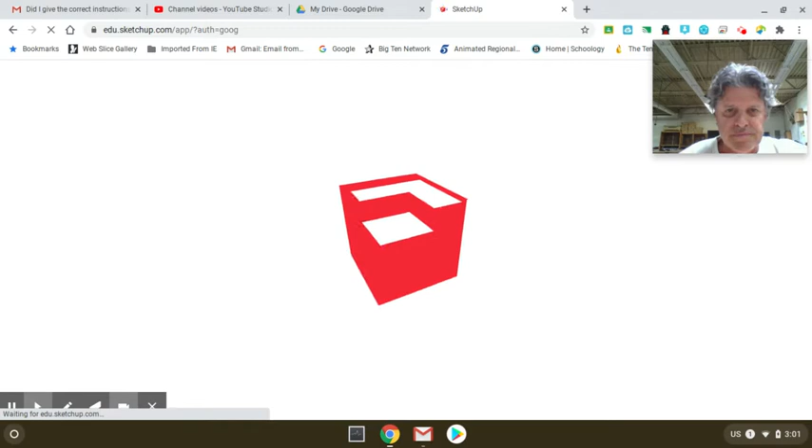We're going to go to the Waffle, and once you're in the Waffle, you can scroll down until you find SketchUp for Schools, and go ahead and click on that. You'll see that we get this throbbing or growing and collapsing building. I'm just going to wait till that gets done. Yours may take a while also, but once it finally opens up, we'll be ready to go.

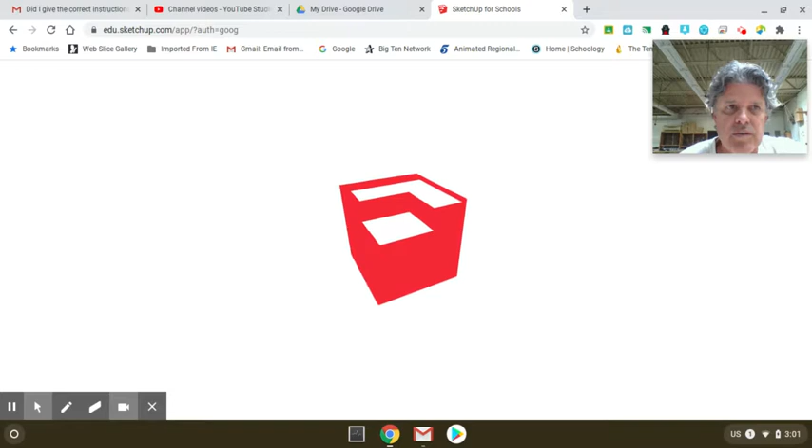Okay, so here we go. I'm back. And you can see once it opens up, it'll look like this. And what I'm going to have us do is go ahead and go here to where it says Create New.

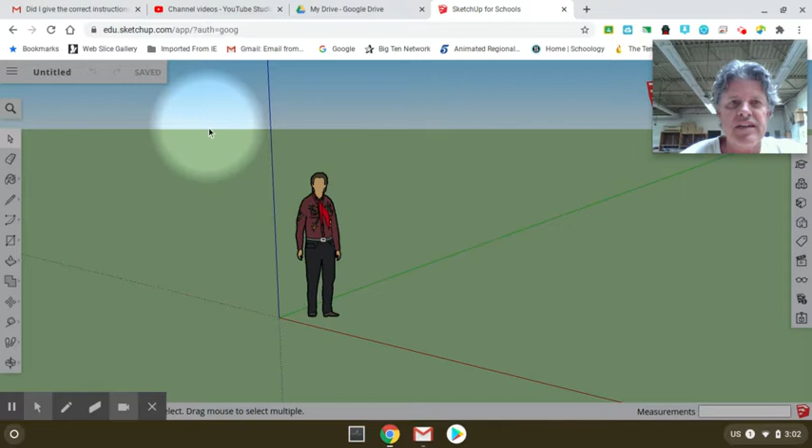Whenever we go Create New, we are going to go feet and inches, so I'm going to go ahead and click on that. And that brings us to this screen here. This is our tool palette of the different things we can do. Hopefully we'll learn a little bit about that as we do this first thing.

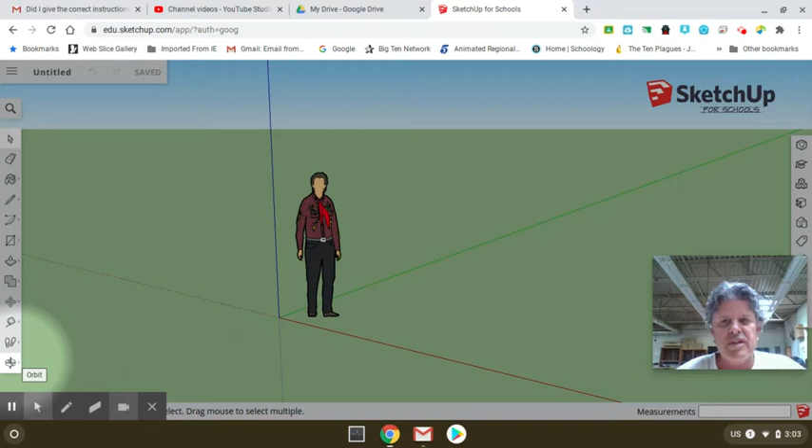So what we're going to do is I have got this 3D puzzle here that students are going to be making in manufacturing. And obviously, if you're a distance learner, you're not going to be able to do that, but at least we can get something done with it here on Google SketchUp.

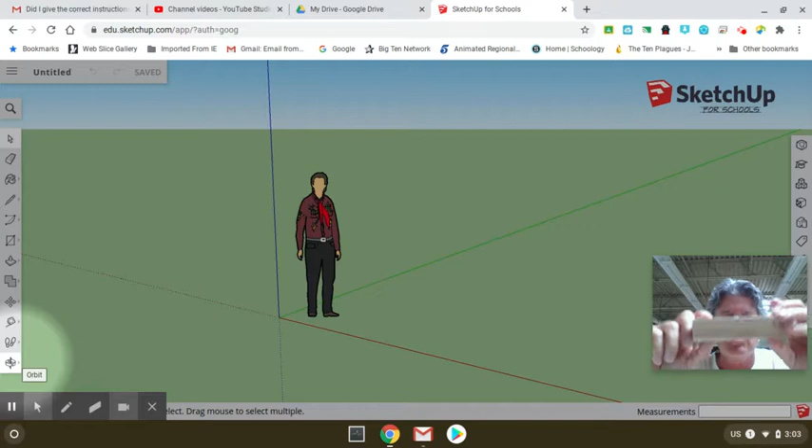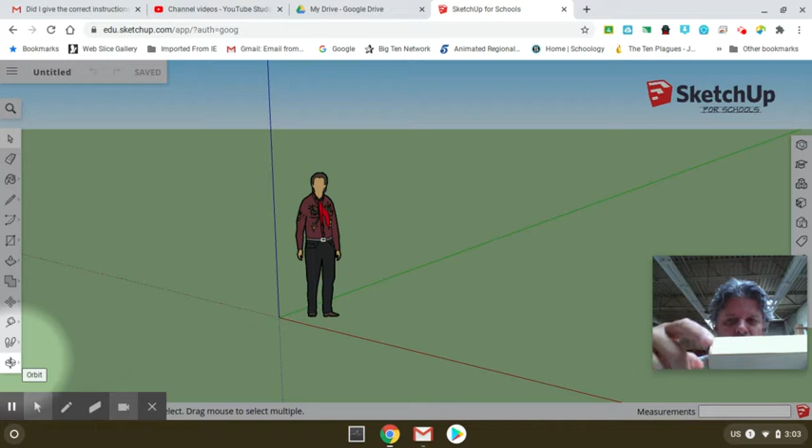So the first piece that we're going to make looks like this, and as you can see, it is 5 inches this way. All the pieces are 5 inches, and all of them are 1¼ inches high and 1¼ inches deep. So we're going to go ahead and just make this piece here, and I'll teach you a little bit of this stuff you need to know.

So the first thing is, here in the middle of our screen is this guy that I call Yahoo. We're going to go ahead and get rid of him, so I'm going to click on him and just hit backspace. And now what we're going to do is start with making a rectangle.

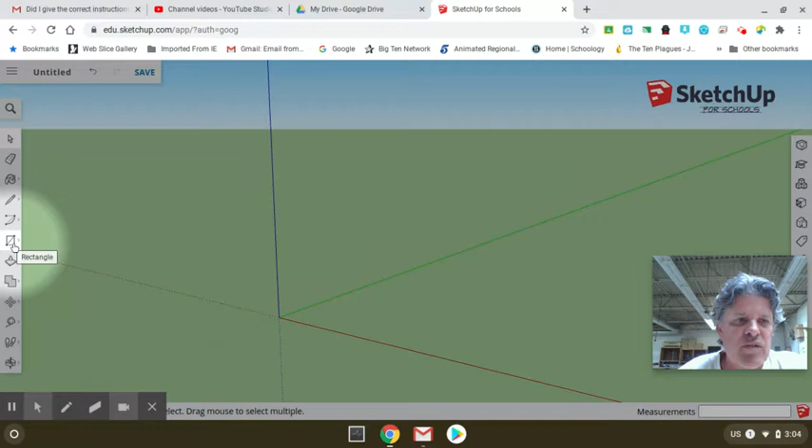I'm going to click here, and as you can see, there's all kinds of different things we can do, but we're going to do a rectangle. I'm going to put the tip of my pencil right here on the origin, and start dragging this way. Now, don't click a second time. If you did click a second time, you can just go here to the back arrow, and then you can start over with a new rectangle.

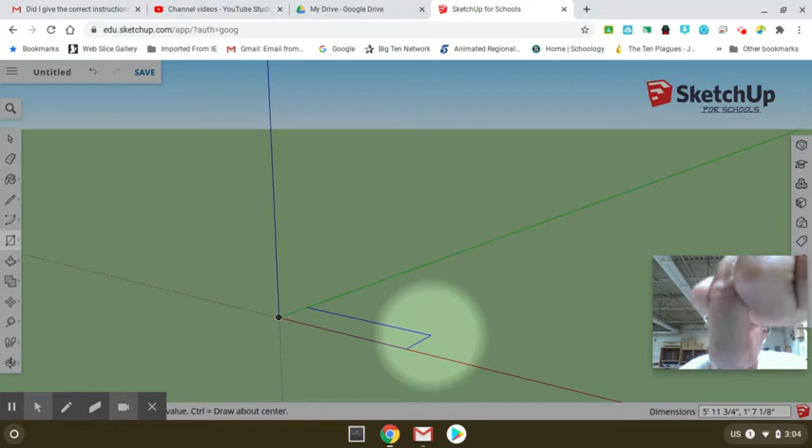Right underneath where you see my finger pointing is where we can enter the dimensions that we want. So I want this to be 5 inches long, so I'm going to type a 5, then put a comma, and it needs to be 1.25 in its depth. I'll go ahead and push enter, and you're going to see this rectangle get very small. See, it's very, very tiny over there.

So what I'm going to do is we're going to use a different tool now, and I have to move this tool palette. I don't know if I can or not. Oh, hide tools. I know if I hide my tools, then I never know how to get them back. So maybe somebody can figure that out, but I've got to hide them.

So here is this bottom command here where we can do different things. One of the things we can do is orbit, so that would be, I can do things like this, turn it. You can't really see it too well without it being enlarged a little.

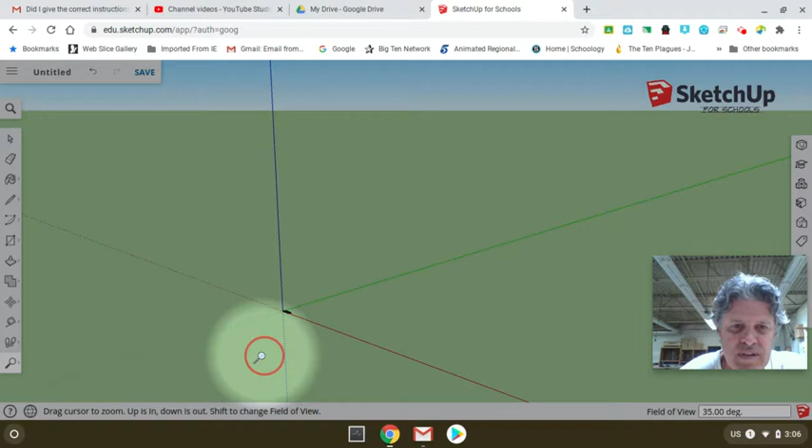Another thing we can do is we can zoom, and to zoom we just go ahead and have our magnifying glass, and we can press and drag. Oh, come on now, it's not wanting to do it for me. Let's try it again. Maybe it's because it's not big enough yet.

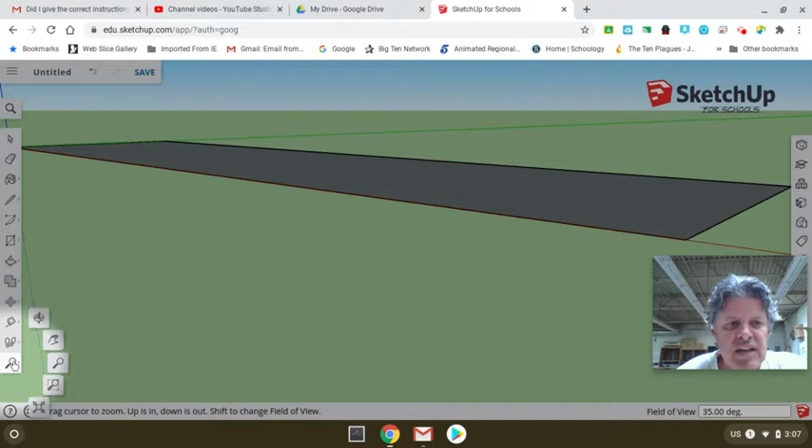So I'm going to go ahead and do this here, which is called Zoom Extends. If I click on that, it's going to get very big, like so. Okay, now if we go back here, I click on that, and now I can do Orbit, and you can see how that Orbit tool works.

Now, this is a little bit larger than I want, so again, I'm going to go over here, and I am going to go to this Zoom tool, and now if I go up with it, it makes it larger, or I can just move it straight down. So you want to move the magnifying glass up and down. Okay, so I've now got it. I'm going to bring it out a little bit further.

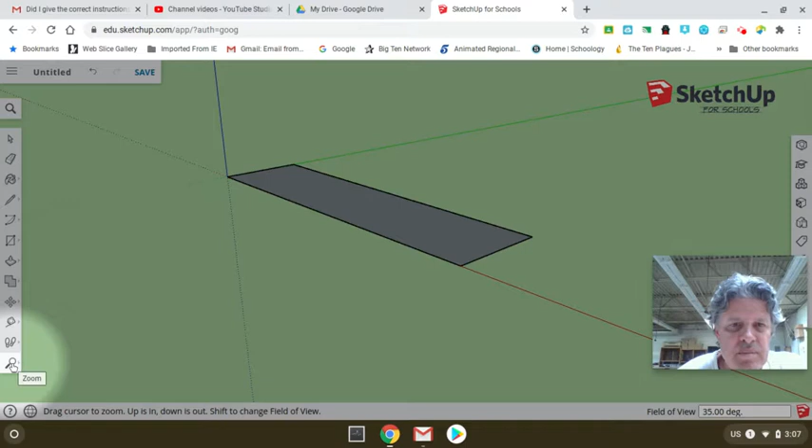And now what I'm going to do is we are going to pan it, which means we can move it. So I'm going to just move it over to here, orbit it just a little bit more. So it's about like so. And then now I am going to go ahead and add the third dimension.

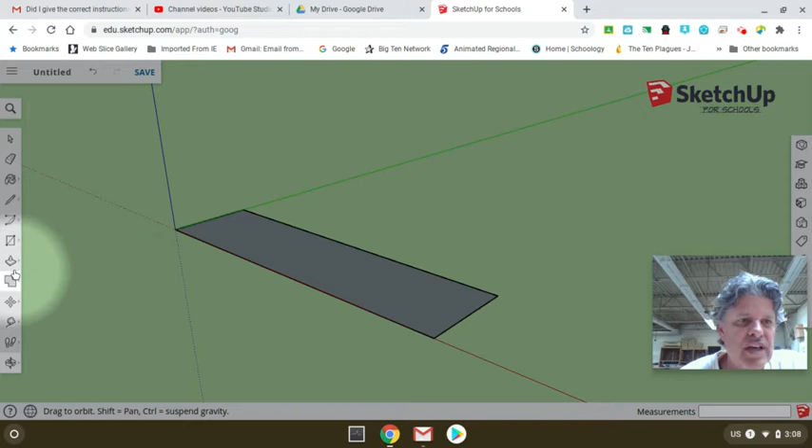To do that, we go here to this tool. It's called the push-pull. We click on that. I'm going to go here on the surface, and we're going to pull that up. Again, underneath my finger there is where we can enter the dimensions, and it needs to be 1.25. Hit enter, and that is the piece that we need.

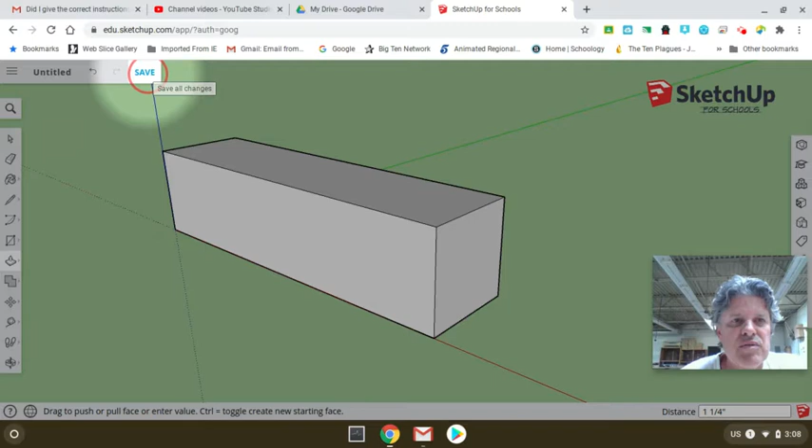So now I'm going to go up here to save, and we are going to call this piece, I'm going to call it, oops, let me go ahead and backspace this. We'll call this 3D Puzzle Piece 1. Oops, I always like to capitalize each word. Piece 1. I'm going to go ahead and say OK.

Now a folder is going to come up and ask me where I want to put it, and we just made the manufacturing Google SketchUp folder, so I'm going to go ahead and select that and then hit select. It should put it in there.